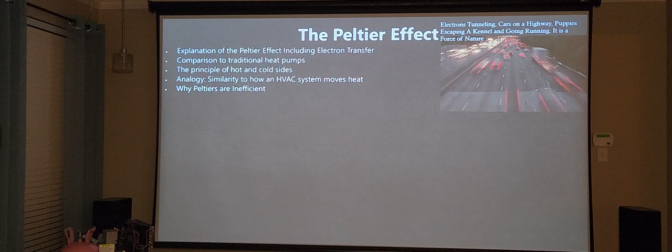Alright guys, what's up? Guys and gals actually. It's your boy Nick here, and today we're doing the Peltier effect. I know we all call them Peltiers, but they're actually called Peltier. The guy that invented them was French.

But before we get into that, I wanted to talk to you guys about mediums. And a medium in the classical sense is something that's in between, right? It's in between up and it's in between low.

Be honest with you, that's my life right now. You invent something and you think it's gonna be like this magical fairy tale that you live with, having this wild new invention that maybe it does something that something hasn't done yet.

Let's say that it does. You end up following inventors for your entire life, studying their every move, where they went wrong, where they went right. And as a child, you had your inventors that were your heroes.

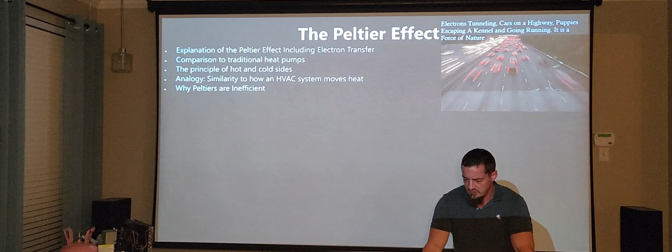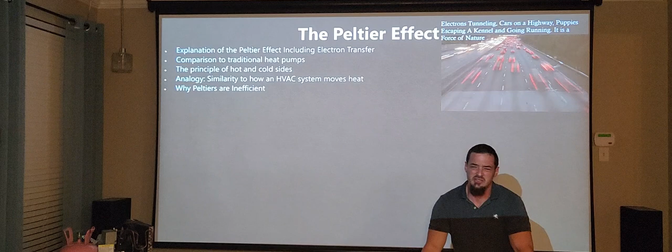And I'll be honest with you guys, I've had a lot of struggles actually. And I was hoping to seek solace. Like one of the things that happens when you invent something is you suddenly feel very alone in the world. And it suddenly becomes a place where you know some sort of arcane thing and nobody else knows around you, and everybody knows that you know something, but they don't know what that something is.

And for you as the inventor, it's an incredibly frustrating time because you just want to teach everybody what you just learned, but the reality is you just don't know what you just learned. And so to go read a book about a hero inventor, almost exactly 100 years ago, who invented what we now know as modern DX refrigeration,

and then laid the absolute groundwork of chiller technology as we know today. Absolute framework. It's undisputable. The guy had to develop what he developed. Willis Carrier developed what he developed because it was a necessity of the time period.

People had just invented houses, to a kind of standard that we might look back upon today and say, yeah, it looks like a house, pretty much. They just didn't have air conditioning. So in the summer it was incredibly miserably hot, kind of like it's getting to at this point again.

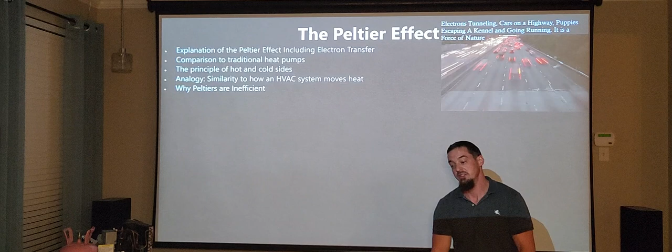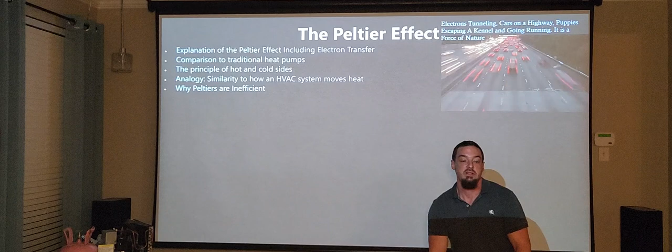And I hate to be the guy that sits down and literally has the intervention with an entire industry of VRF about this technology needing a revamp.

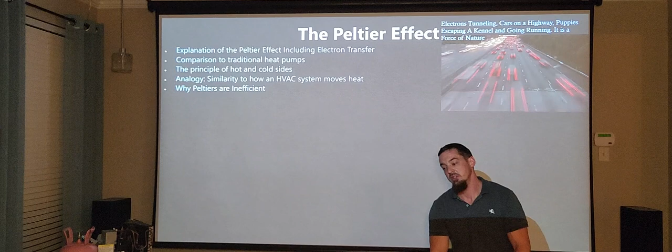So that's some of what's going through my mind right now. And it is a tough time to have watched a hero of an inventor completely miss out on this technology. This is a very difficult presentation for me to give because I'm an air conditioning guy. I've been through all the struggles you guys are going through, worked in the heat, worked with customers in the heat, and worked with customers whose equipment leaks and gets damaged.

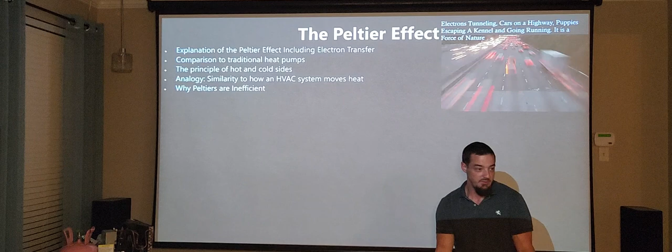That's besides the point though. The point of today, and I know that's a morbid subject and we're getting off topic here, but it's something I had to get off my chest. My channel is live, raw, unfiltered. That's just the way I am.

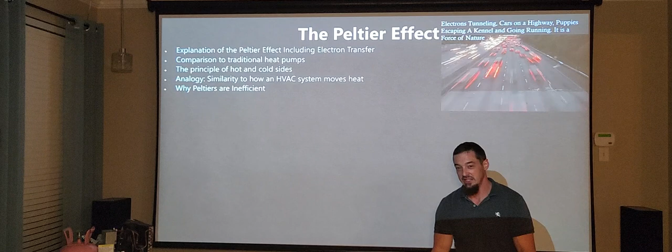But today's discussion, or side topic as it is, was a medium. I think that's really important because a lot of you guys are starting to tune in that it may not necessarily be this technology that's changing, it's just the medium that we're using. I want you guys to remember that as we go through this.

I see things changing in this industry, and we're going to have to start thinking of DX refrigeration in a different way, because there may be devices that allow us to transition to this new technology. It's in discussion, we're trying to figure it out. There's some stuff in the presentation today where the functional analog isn't 100% complete. We have ideas as to what the last little missing puzzle piece is, as you're going to see. Some of you may know what it is, but we don't want to say anything.

In science it's called a confidence interval, and it's probably about 80% on what that last little piece is right now. But as we piece these things together, and hopefully we work together in piecing them together, maybe we'll come up with some really cool stuff for the industry, and maybe everybody can find out how to work together a little bit better.

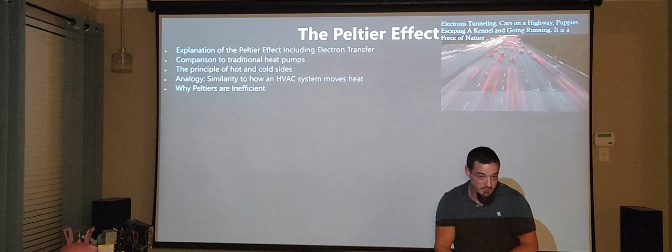That's my humble opinion. But that aside, thinking about mediums, thinking about refrigeration as a medium, I'm going to blow your mind real quick. So this is what I would call a medium, right? It's a can of R134A. And to me, this is just refrigerant.

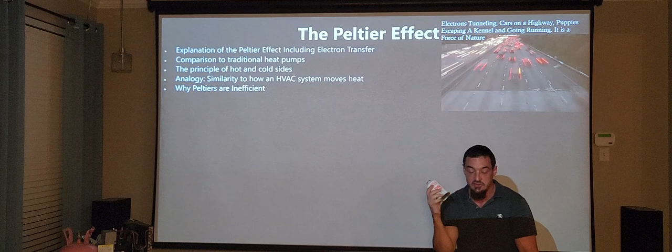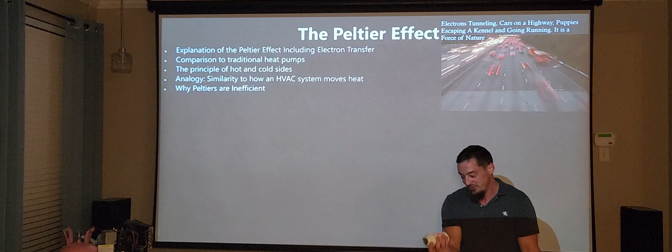Now today, to chat about some stuff, I brought my buddy Mysterioso over. Mysterioso is an AE, an aerospace engineer, something you'd think would be completely incompatible with somebody who would never look at refrigerant. He picked this up off the table and said, man, this is what we use in satellites. I said, wouldn't you use an ion engine? He said, nah, you know how big that power supply is? We'll never get that into space. We used R134A.

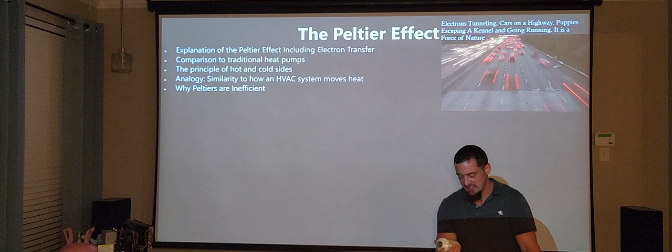I said, this actually, I see what you're doing in space now. I see this, it's just a different medium. I would have picked ions in space, but you picked refrigerant. This actually is just a different medium. I get it. This is like a battery, and it's just in a different state.

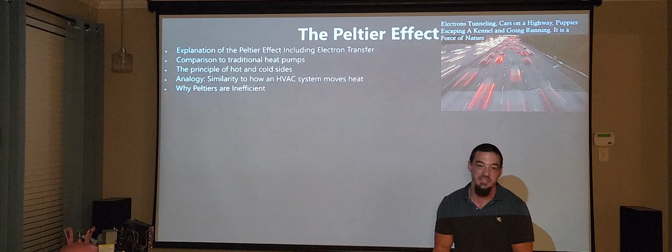So bear that in mind as we go towards the more fun part of the day, which is obviously explaining what this effect is on a silicon-based level, because if we have a new medium, what's the medium doing, and what is this functional analog that Nick is talking about? I'm going to get into that.

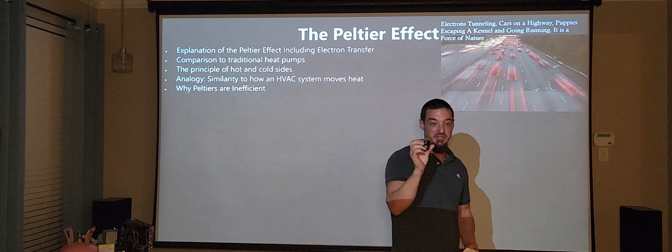We got to start thinking of, maybe this one day might be our big jug of refrigerant, and maybe we might have plugs in the wall that already got refrigerant in them. It may not be the absolute most efficient way of doing it today, but it's rapidly getting more efficient.

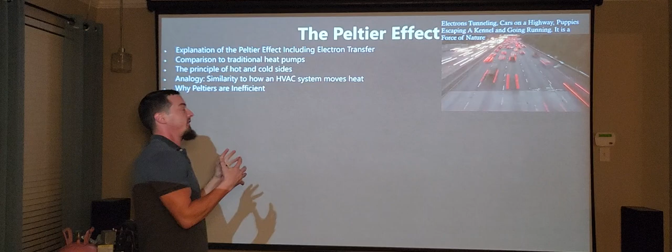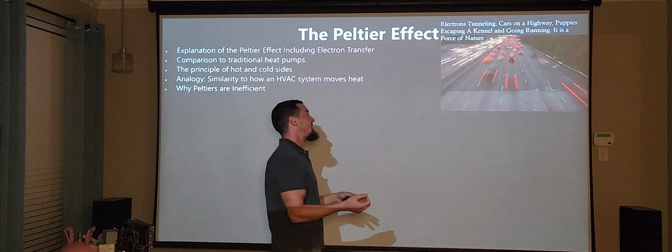So let me advance this a little bit for you guys. So this is a Peltier. I'm going to call it Peltier because I'm a Texan. This is one of these little chips. This guy.

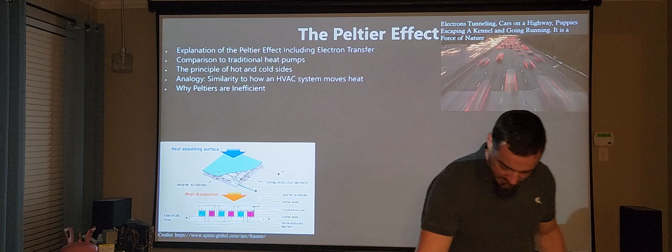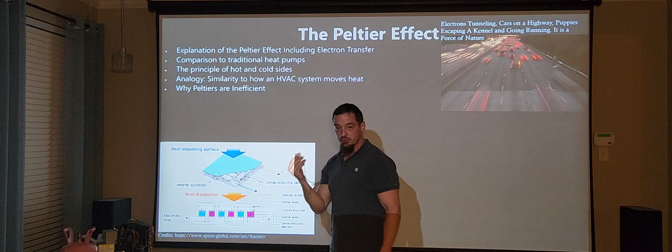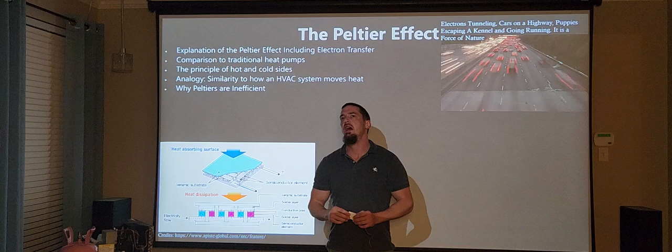These are pieces of ceramic, if you look at them from the outside. The ceramic's there for a reason—it's an insulator, similar to the ceramic you might find in Pyrex or power line ceramic. It's conductive to heat but completely resistant to electricity, so it's a very thermally conductive type of ceramic. But that's there for a reason.

You'll notice there's a positive and negative lead, and in this picture it's energized. So you're supposed to know that heat is transferring—it's rejecting heat out of the bottom and accepting heat into the top.

You see the ceramic substrate, solder layer—we're going to talk about that—conductive plate, solder layer again. That's just a little solder sandwich up there, and we're going to look at this much closer.

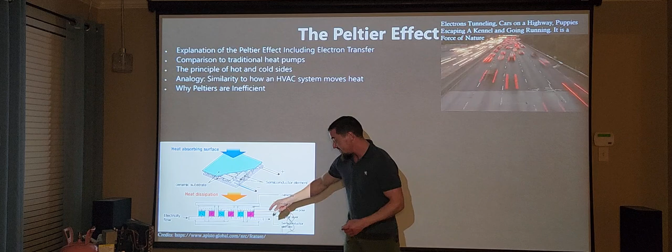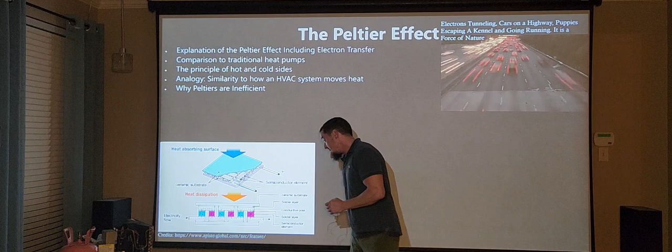Then there's the semiconductor element, and when people see these little charts it's a turnoff for a lot of people. The reality is these are just what are called bias gates, and that's important to understand. They even say N and P, so we probably already know from batteries what that means. But let's take a closer look.

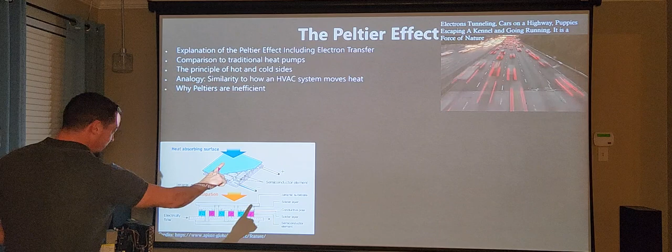You notice it's kind of sandwiched, and it says electricity flow, with a little zigzag pattern. It would look almost like we have light bulbs wired in series, and that's the reality. Let's go forward a little bit.

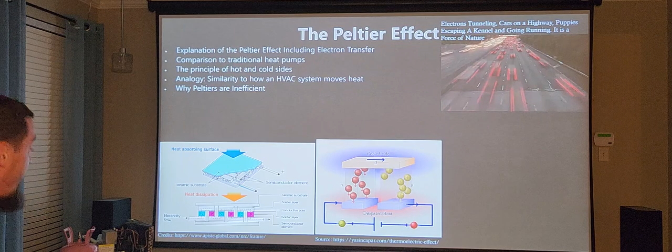This is one of those little things in the sandwich—these are called junctions. There are quite a few of these, but they have to be built in a special way. I'm going to go into that a little, but not too deep.

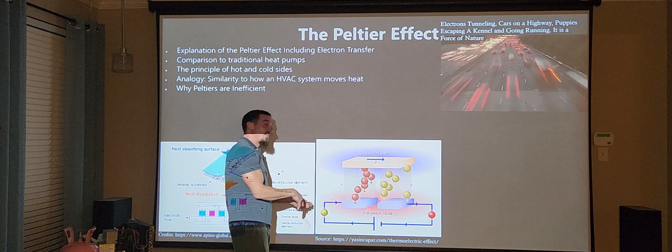The way they're built is special because these N and P junctions transfer heat in the same direction. If these were stacked on top of each other—which from what I know of silicon manufacturing so far is a common orientation—it allows you to do more with traditional silicon in a computing environment. That may be better for computing, but for transferring heat, this architecture is an extremely inefficient way of doing that on silicon, for the purpose it serves and where it's gotten so far.

In the air conditioning industry, the functional analog we have so far is this: each one of these junctions is an entire air conditioning system. You might say, Nick, you're crazy—how is that an air conditioning system? But this is an air conditioning system.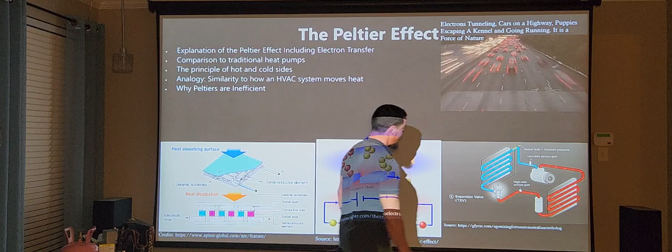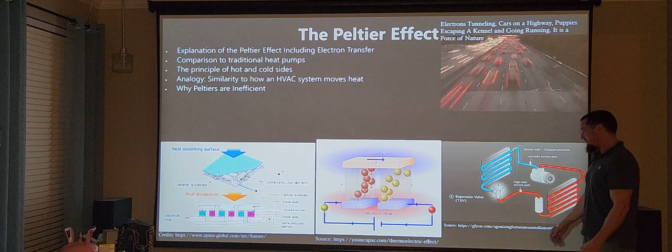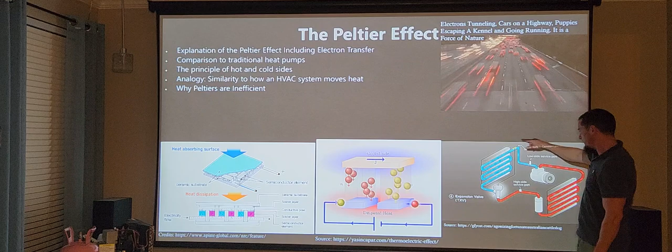My air conditioning system is composed of a compressor that moves refrigerant gas over to this condenser, where I get rid of all the heat, and it turns into a warm liquid. Then it comes over here and sprays out through this expansion valve, getting cold because it goes through a phase change. Then it absorbs heat in here and comes back into the compressor to get pumped back up, charged back up again.

Oh shit, did I use the wrong word? Charged back up. Uh-oh. This thing might actually be doing the same thing.

What we know so far, and what we theorize, the working analogy is pretty close on this one. The battery is now your compressor, this area is your condenser, and this is where your electrons start riding a transport chain to go up.

Really, these are what are called doped semiconductors. They are baked in an oven in such a manner that they form chains or strands where the electrons flux, because the electron doesn't actually move—that's another critical thing to understand about mediums. The energy is being transferred; the electron isn't riding an elevator up here, the energy is being transferred up.

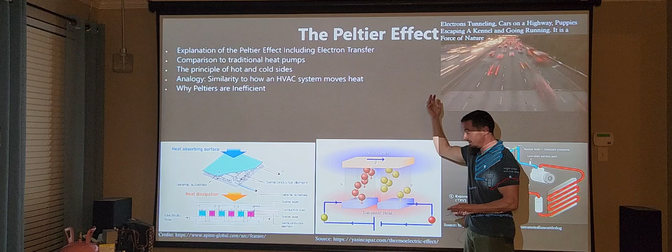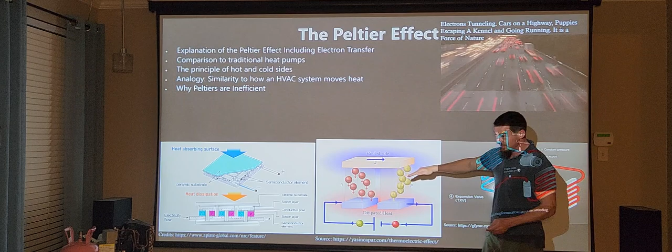As these electrons get to the top, they kind of settle. While that may sound like a condenser, if you were to zoom into here you'd almost see where these—again, these were bimetallic junctions, so this is still a junction—there would have to be some sort of weld on a dissimilar metal. And a dissimilar metal, as we know from batteries, when metals like zinc and copper are put together, that makes a charge. Something very similar is going on here—we have energy transferred up, and it settles down.

Now, how is it cooling, though? The reality is these electrons are tunneling again—they're coming back down.

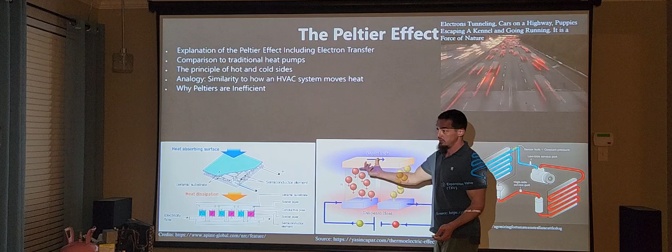The transfer of energy is coming back down through the electrons, and by doing that, it creates a cooling effect on the top. Not too dissimilar to an orifice.

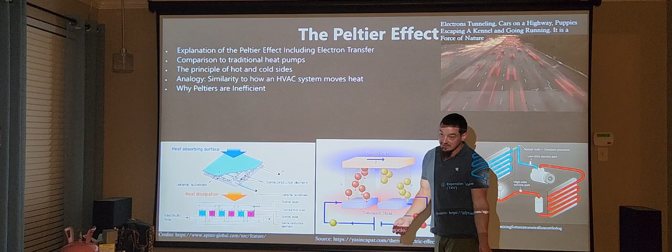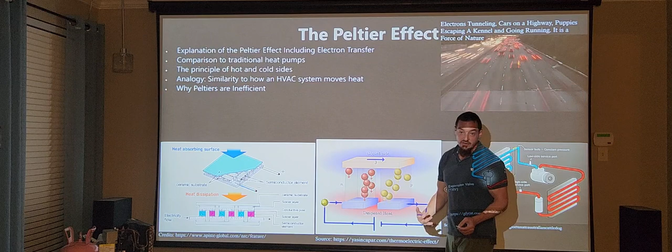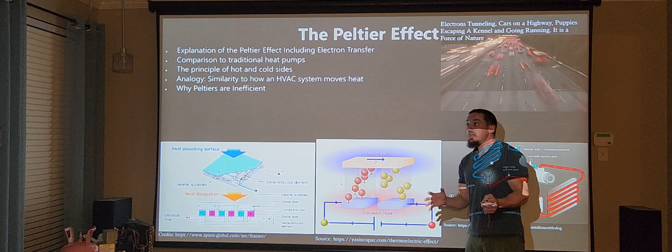The reality is, I'm going to show you scanning electron microscope images in a second, and it's getting to be a pretty close functional analog. I say that with the understanding that you can only have so much confidence in what a functional analog does, or to what extent. We're getting pretty confident this functional analog is working because principles of other things we already know from other mechanisms are beginning to light up. So that's why, even as scary and fast as things are moving, I want to slow down and try to teach people what I'm understanding so far.

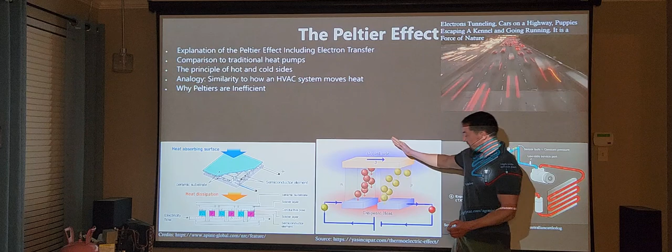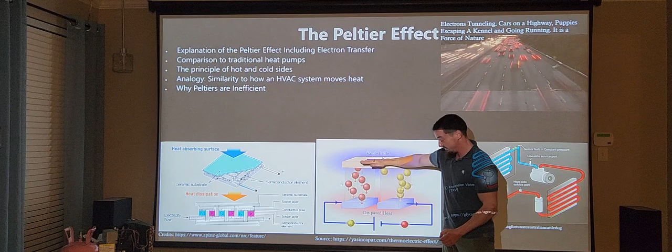So anyways, the general momentum, as we might call it, or the transfer of energy, or the current J, begins to ride down. And as it rides down, it creates that actual cooling effect. Again, not too dissimilar to a TXV, it would be up here, and that, if it were connected to a piece of metal, would cool that piece of metal. Then, as it comes back down, it settles and comes back to the battery where it gets compressed for the next cycle.

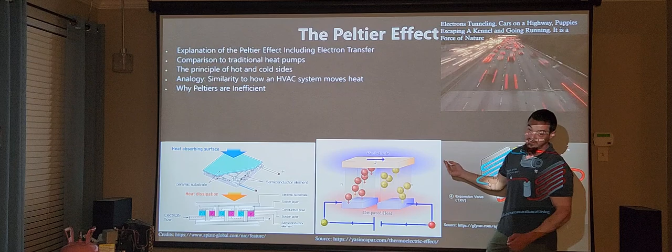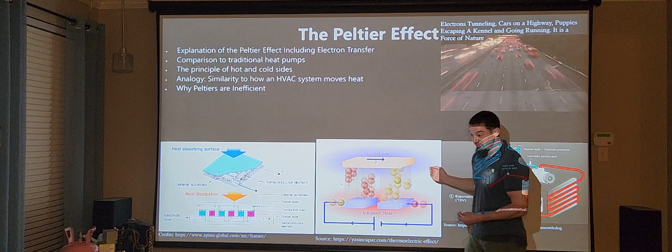The reality is, this isn't moving. And that's the conclusion I came to today that really, at least for me, opened my mind. This is not running water in a loop. It's a transfer of energy. It's a medium. And if we move over here, and this is going to really sound crazy, this is transferring energy as a medium.

The refrigerant is getting compressed. We have a term we use called heat of compression. It is generating heat, and the heat as energy is traveling through the system. Wouldn't it be a weird world if you removed the compressor and then heated a pipe to the heat of compression, and then allowed that refrigerant flow to move through the pipe and condense, and then even be passed through a check valve? What would happen then?

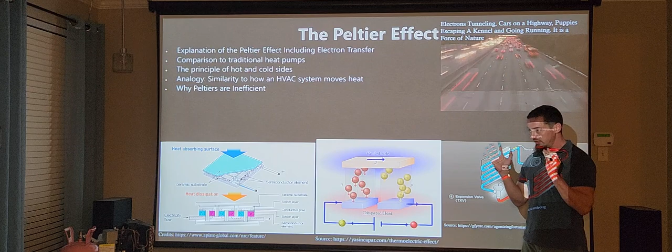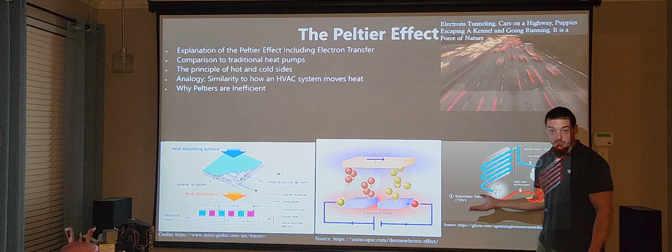You might even get cooling without a compressor. And that's the wild world we're beginning to see. If we look down the barrel of what might come next, it's a world of heat pipes that may be driven by solid state machines. But the reality is, at an electron level, we may have hundreds, if not thousands, if not millions of tiny little compressors doing the same sort of thing - you want to call it a phase change, but it could also be a medium that's a polarity change. How is that different?

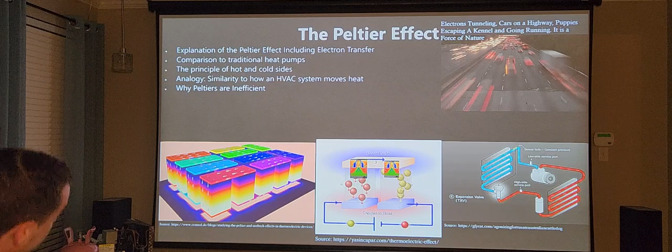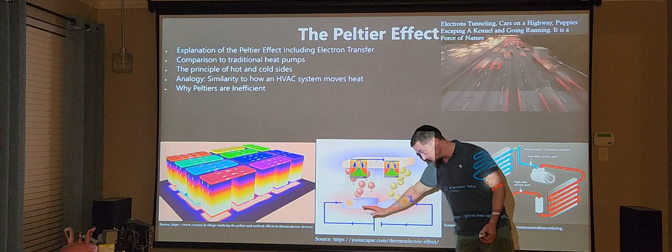I thought this was very interesting because, in my functional analog so far, we are compressing the electrons. The electrons are going through a check valve, or the electron flux is going through a check valve. The flux moves through here, it goes through another check valve where it starts losing its energy. When we think of it as a check valve, it's an electron tunnel - it only allows movement in one way. So functionally it's acting as a check valve. It settles down, releases its heat, moves back and gets heated up again, just like the heat of compression over here.

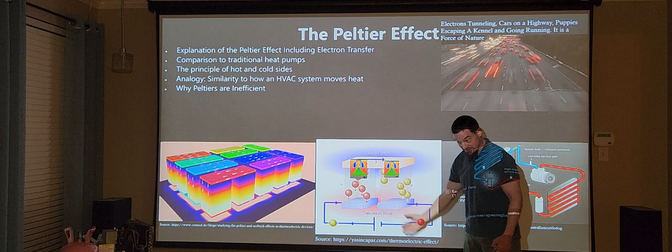So the reality is we have energy completing a circle of life, so to speak. The compression cycle - you want to call it the adiabatic cycle, it's not, but we have a similar effect going on over here as over here. This chip in particular, a 150 watt chip, has 127 of these little guys per chip, and they're oriented in different directions so that all of these can be wired in series for the same effect. If you were to look at the bottom of these, you have the other part of your junction that releases the heat.

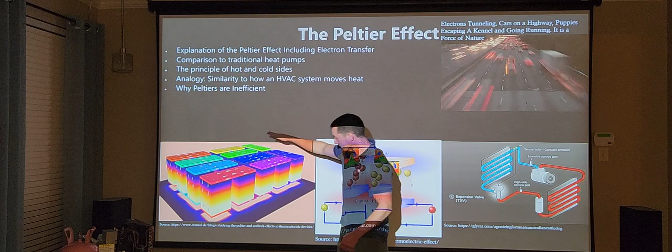It's an energy transmitter if you want to call it that. Everything is bonded so that it can all be in series and conduct. Due to the architecture, you don't put one on top of the other, because then the heat won't flow through the device. Normally they're angled towards each other like magnets, so the heating effect cancels out and you get the heat flux, this very cool little heat pump device.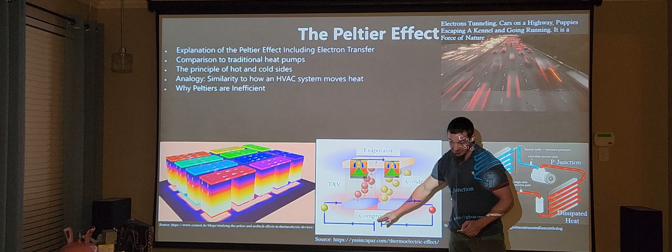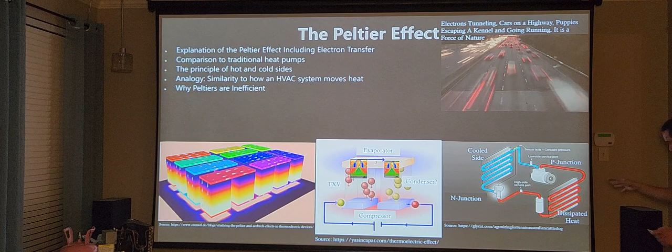We know this is the evaporator. We know so far this is acting as the TXV. We know so far this is acting as the compressor, because that's our medium. We don't know yet that that's the condenser - I'm trying to find that out for you guys. So over here we may have the same thing, right?

We have a P junction, which is our positive side, our hot gas. Got an N junction over here, which is the negative side, our cold gas. And then we have our cooled side and our dissipated heat side. Seems to make a lot of sense.

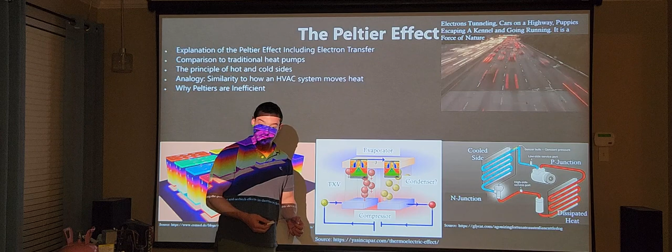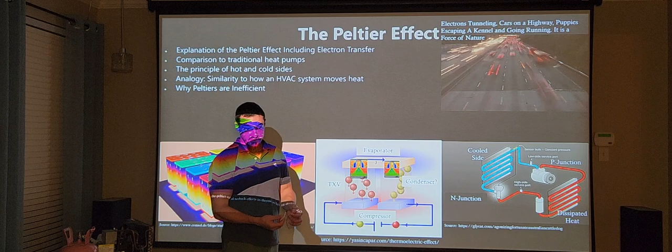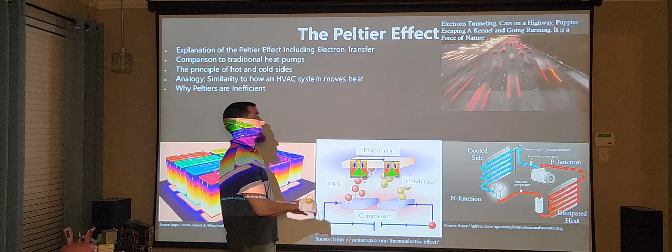Now, I can't say with 100% confidence that this analogy is 100% functional - that's why I go through a lot of stress every day right now. I have a good working analogy for this, and things are starting to light up. But the reality is, when you invent something, you just don't know - you observe, and record, and become empirical. When you start seeing these things repeat, and start seeing other patterns from other devices light up. So for now, for me, the functional analog is functional until I find dysfunction within the analog.

So that said, we compared these traditional heat pumps. We talked about electron transfer. We talked about the principle of the hot and cold side. We talked about similarity to how an HVAC moves heat. We didn't talk about why these things are inefficient.

We're going to get more into that later. For those of you from the 90s that might know these devices - for me at least, I was pretty close to computers, but the first time I ever saw one of these was probably around 1995. I want to put a mark on them - they were about this size. They were really bad. These are not nearly as bad as they used to be. But they came out in about 1995.

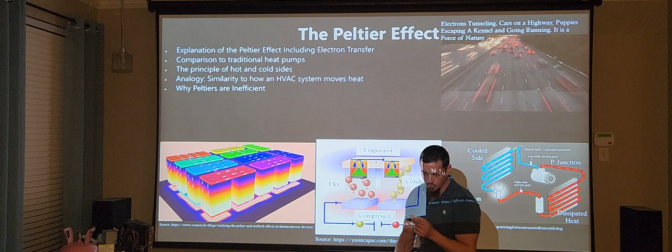Why are they inefficient? There's a couple reasons why they're inefficient. We're going to dig into the whole power thing here in a second, but in general, the reason these are inefficient is that people drive these at full power, and that's stupid - I'm sorry that I said that. It's not a great idea for a computer chip to run at its absolute max power, or any sensitive piece of electronics like this. You want to run it at its most efficient point. People are not running these at their efficiency point, and that's why these have gained a reputation as an inefficient device. There, I said it.

Point two: these got popular in the late 90s with computer gamers - which we're going to talk about, that's fun too, computer gamers. They started getting cheap in the 2005 era. But people would just buy these chips and think of them like heat accelerators - like, I'm going to plug this in and whatever amount of heat, this square area is just going to suck it away. No, we all know in the air conditioning industry that you have a specific BTU amount that moves heat. In the computer industry, it's watts, not BTUs, so you're going to have to translate back and forth a lot.

What people would essentially do is take a 200 watt processor and put a 150 watt cooling chip on it, and scratch their head as to why these things would keep blowing up. So they gained a reputation of, wow, this sucks. Every time I put this on, it doesn't even cool, and when it does, it doesn't cool very well. Why do we even use these things?

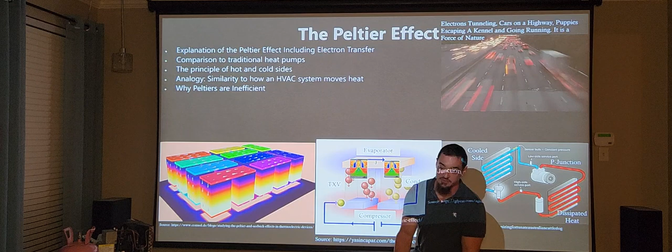And there may be ways that we can unlock in this chip. So the next episode that I have, so to speak, is, well, how, now that we drew a functional analog, or as you say, Nick, a somewhat complete or near complete functional analog, how would we try to go and start applying that? How might I go build a device that, God forbid I try to compete with you, Nick. How would I go build a device to get started? What would I do? How would I try to tune it?

If I started from one chip and tried to build to where you were - by the way, you're not going to copy me because I already back-engineer my own devices and make sure they have Willy Wonka loop-de-loops in them, so go ahead and try. But God forbid I want to build a chip of my own. How would I go about starting and doing it and trying to make it efficient, as you say, and try to get the results as maybe you do?

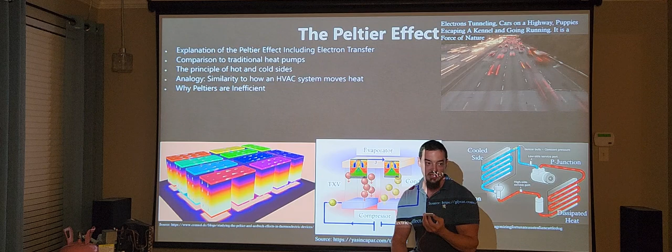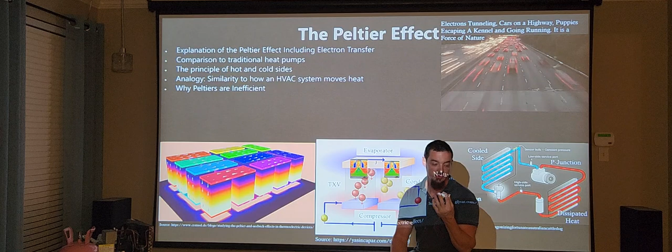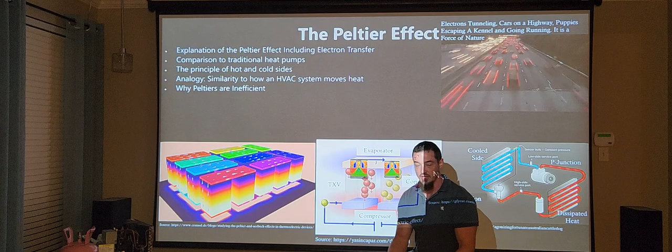We're going to talk about that next, because there's a definite way, and there are definite things that you can do, and there are definite things that I can tell you right now that can get you caught up to scholarly literature right now, and I feel like that's a good place for me, at least, to be with things. I feel like everybody needs to get caught up with scholarly literature on this, because scholarly literature at this point is telling us how to make all of these efficient. I'm not the only person anymore that was sitting on the COP charts looking at these things. You guys need to open up the COP charts for these things. But we're going to talk about that next, because that's not an easy journey either. It's unlocking the COP. There's some stuff we've got to do.

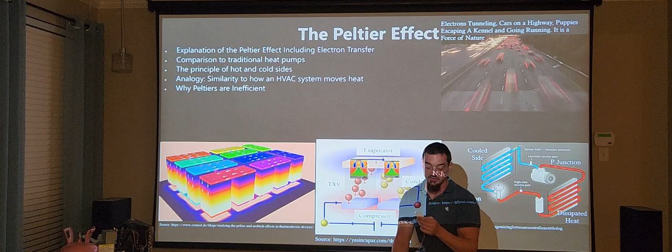But thank you guys for listening to me. I know this one took on a little bit more of a serious tone, but it's kind of a serious topic. And I think armed with this knowledge and an understanding of this, moving forward, there's a lot of potential that we can unlock in these chips. We have to understand what's going on in the architecture first before we can try to push that architecture. So thank you guys, been a good one. Wish you a good evening, and we'll go ride my bicycle around.